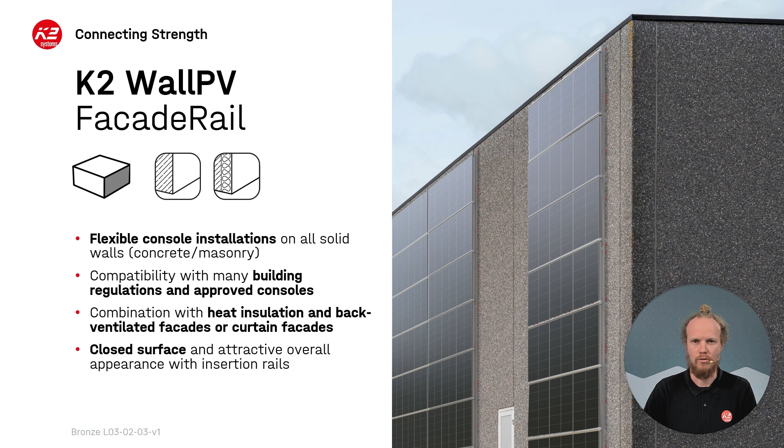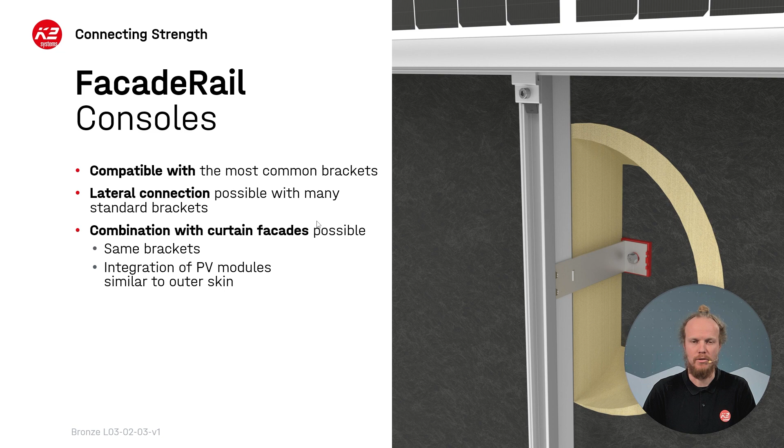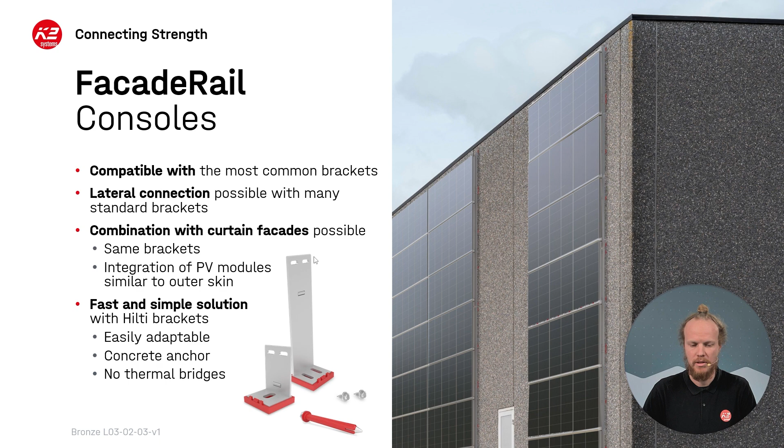The facade rails are connected to the facade using existing brackets or consoles and are installed laterally. The use of the existing brackets allows for a combination for traditional facades and also curtain facades. Using a combination with companies such as Hilti or EJOT, the existing brackets allow for easily adaptable systems, concrete anchoring, and no thermal bridges within the facade installation.

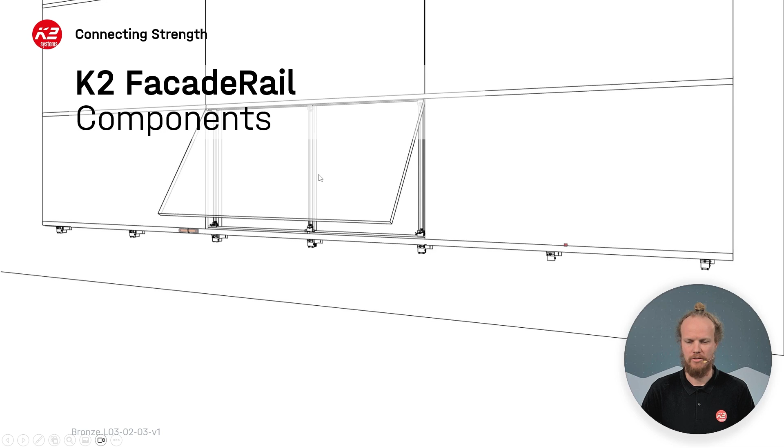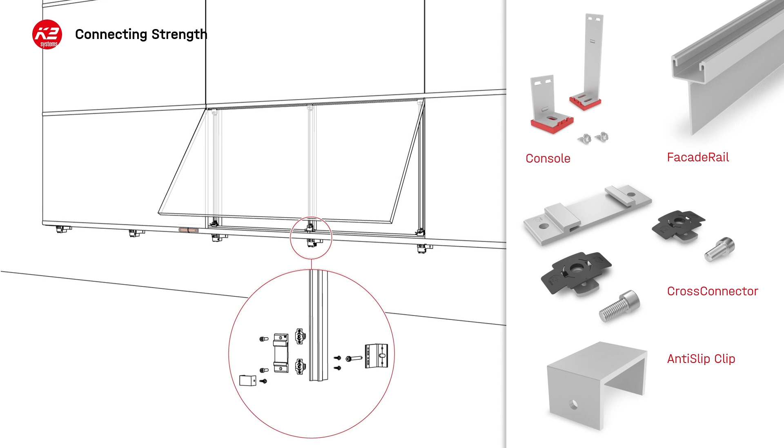To take a closer look at the components in the K2 facade rail solution, let's dive into the assembly instructions. The first product in the assembly instructions is the console or bracket, which fixes to the facade wall. Attached to this is the facade rail itself, and connecting to that will be the cross connector and the anti-slip clip. Sitting in the cross connector set is the insertion rail 2.0, available in black or silver and suitable for modules of 30 or 40 millimeters in thickness.

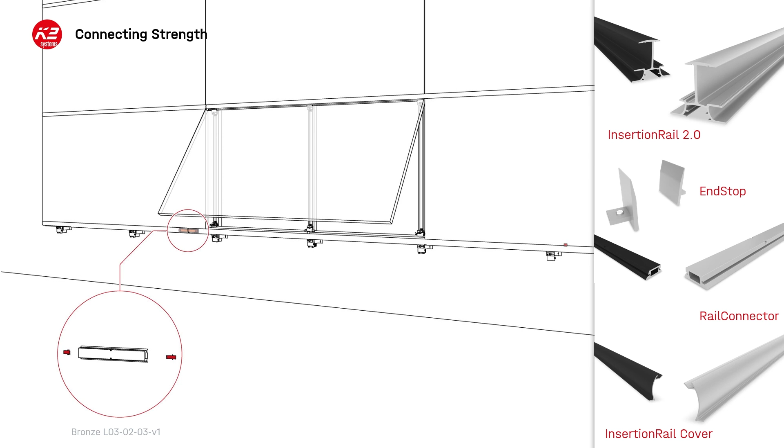The end stops connect to the end of the insertion rail and stop any sideways movements of the modules. The rail connector set, sitting between the insertion rails, allows you to connect sections of rail together. The insertion rail cover can sit on the top or the bottom of the insertion rail and adds the final aesthetic touches to the system. The module safety sits between modules and ensures that a constant distance is held across the whole facade.

The fix stops are attached to the insertion rail either side of the cross connector sets and fix the insertion rail to stop any transverse movements across the facade. The spring plug slides into the cross connector set and ensures that the insertion rail does not move vertically on the facade wall. As an option, the TerraGrif provides a solution where equipotential bonding is required.

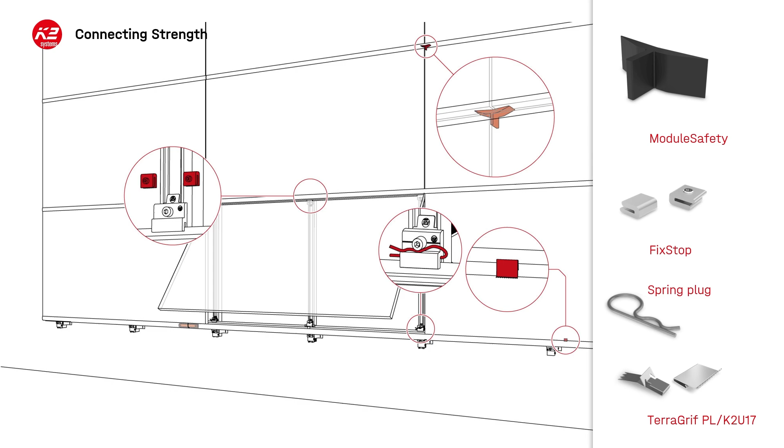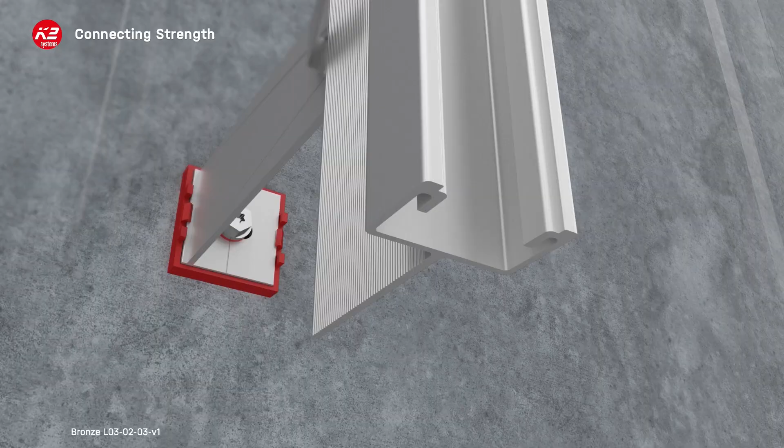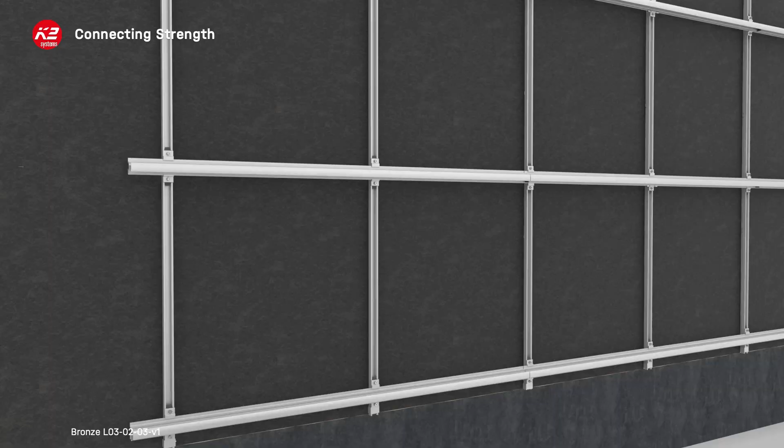Let's now take a look at an animation of the K2 facade rail assembly. The brackets fix on the wall with specifically designed screws. The facade rail will then fix into the brackets with 2 or 3 screws. The anti-slip clip and the cross connector set are fixed into the facade rail, and the insertion rail then slides into the cross connector set. This allows for easy installation of the modules horizontally or vertically with the easy installation in the insertion rail. The modules can then be installed vertically along the wall and then horizontally across.

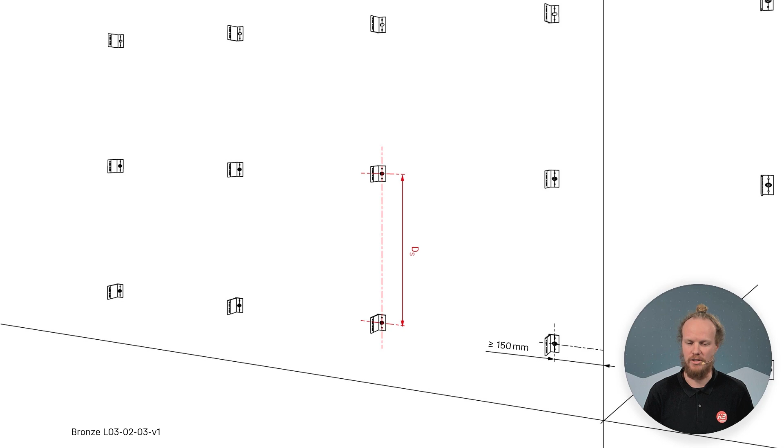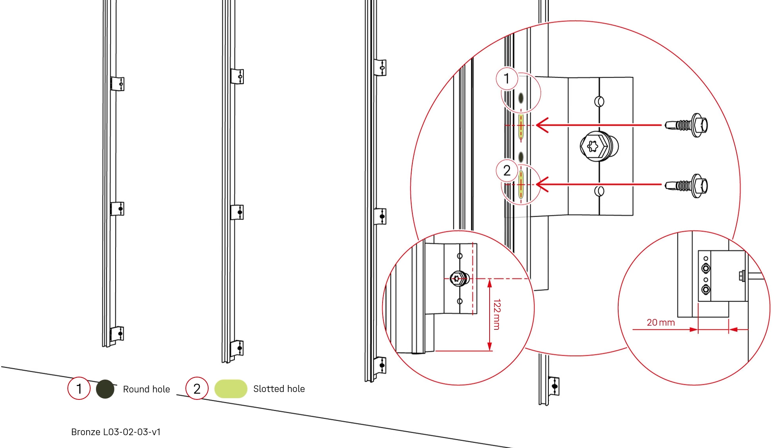The distance between the brackets vertically will be determined by the length or width of the module depending on the orientation in the design. This distance will be given in the K2 report. The rails are then mounted vertically, first clipped into the brackets and then fixed with screws in either round or slotted holes. This information is provided in the K2 report. The distance between the end of the rail and the bracket is shown here and can be found further in the assembly instructions. The cross connectors are then installed starting at the bottom of the outside 2 rails.

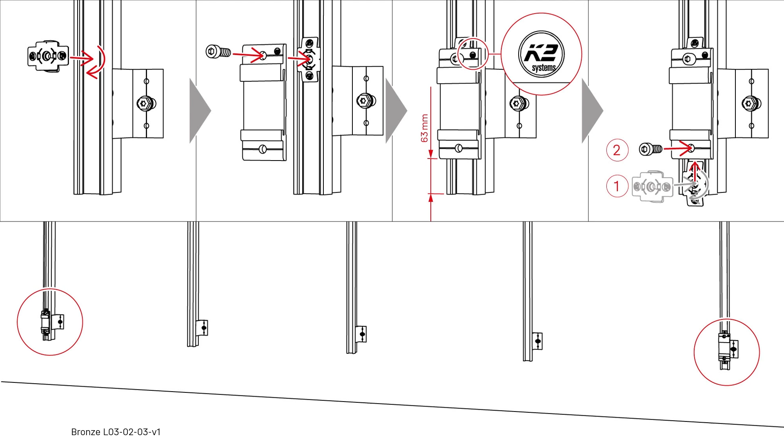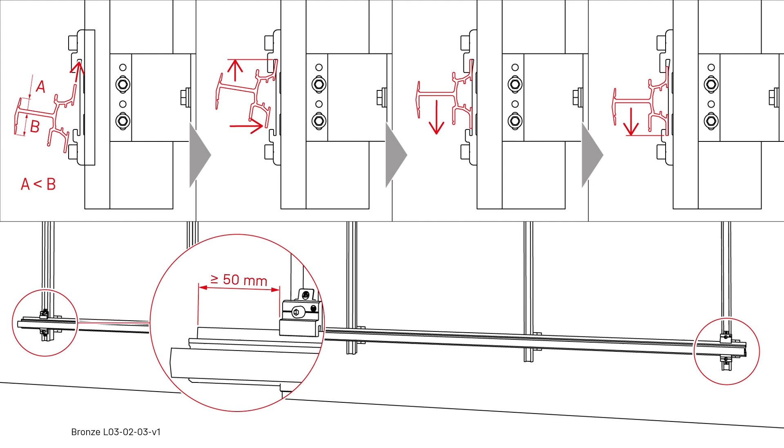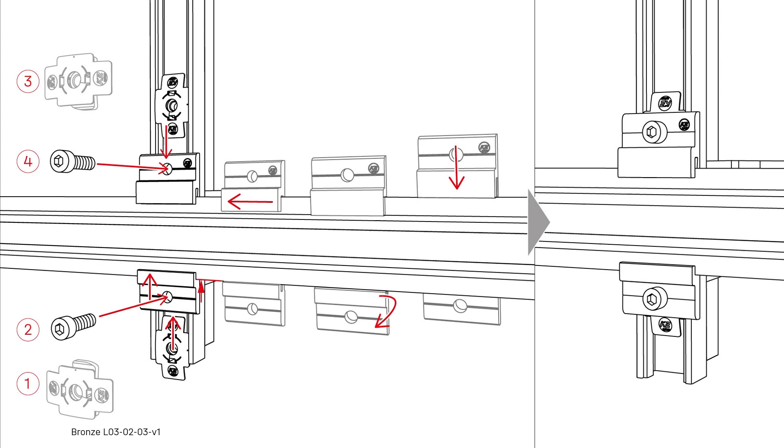The distance from the end of the rail is shown here, and the installation of the cross connector set utilizes the MK2 and an M8 bolt. The insertion rail can then be installed in the cross connector utilizing the asymmetric shape of the cross connector set. Ensuring that the shorter side is on top, the insertion rail installation is quick and simple. The remaining cross connector sets can then be installed by hanging them on the insertion rail and then sliding them between the insertion rail and the facade rail. They are then fixed using the MK2 and bolt as previously discussed.

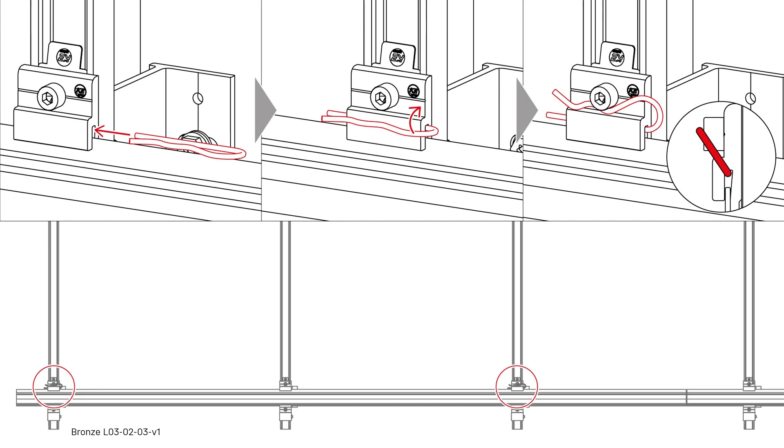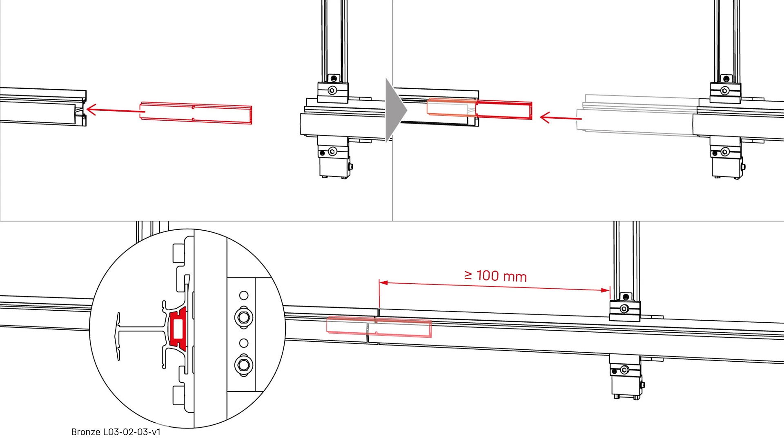Spring plugs can then be inserted into the gap between the top part of the cross connector set and the insertion rail to ensure there is no vertical movement of the insertion rail over the lifetime of the system. The specific number of spring plugs required will be specified in the K2 report. If multiple rail lengths are needed, these can be joined together with the rail connector set. The position of the connector set should be no less than 100 millimeters away from the cross connector set.

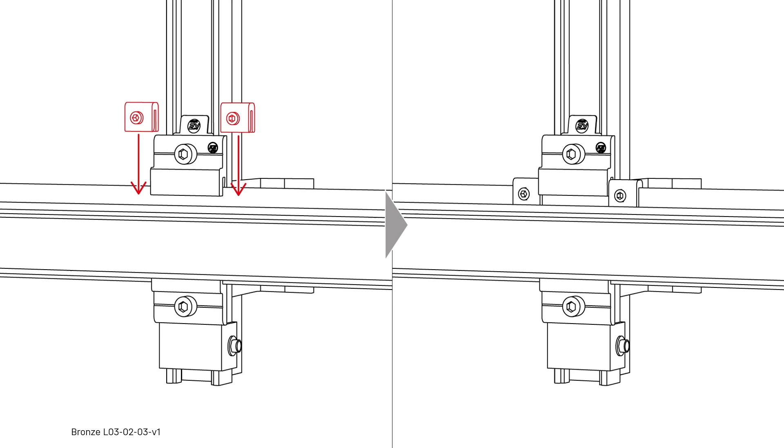The fixed stop sets are placed in the middle of the insertion rail on either side of the cross connector set to ensure there is no rail movement due to thermal expansion over the lifetime of the installation. If multiple rail lengths are used, a fixed stop must be placed at the end of the rail as well. Once the initial rail has been installed, we can then move on to the rail directly above. The distance between the cross connector sets is relative to the height or width of the module, and this will be shown in the K2 report.

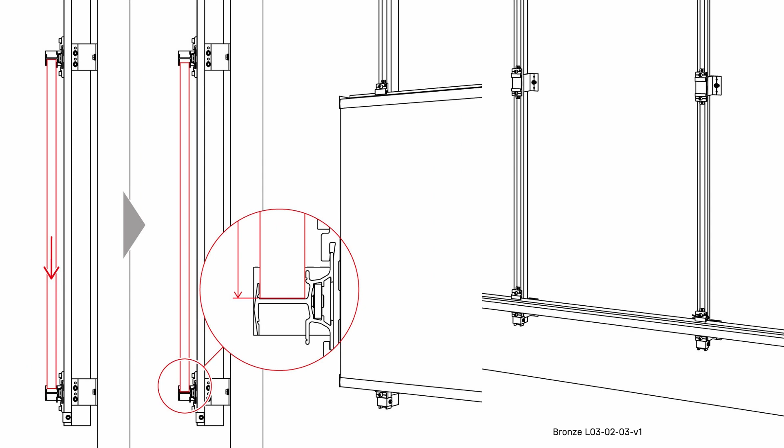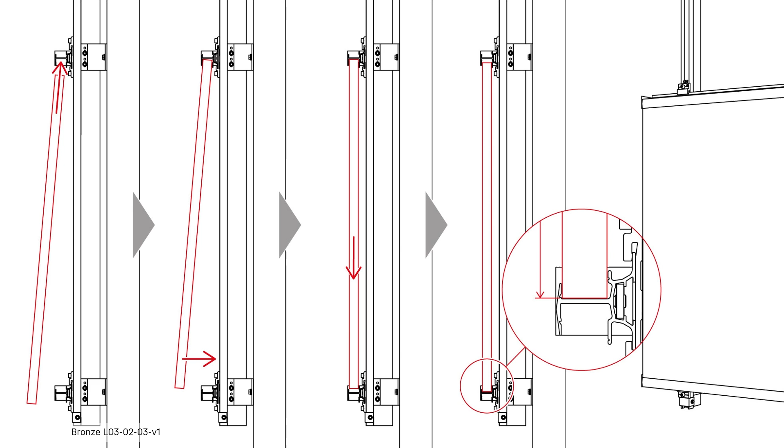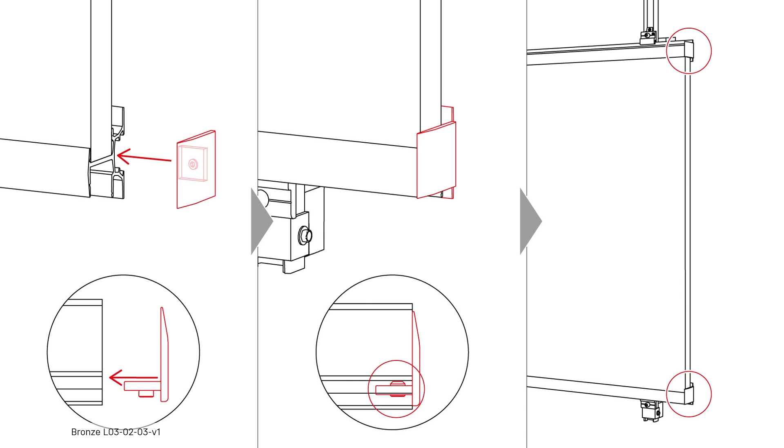Following the installation of the rails, the modules can be installed using the asymmetric function of the insertion rail. The modules are first slid up into the rail and then sit on the rail below. To ensure a standard distance between each module and help reduce vibrations, a module safety is then added. The final step is to install the end stop and ensure the modules are held securely in the system.